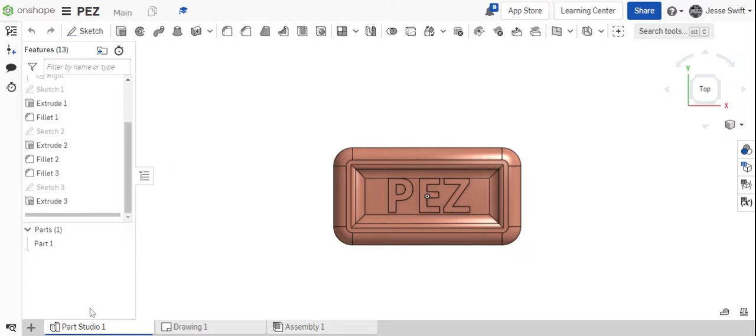All right, good morning. Today's goal is to have you draw a PEZ similar to this, and we're going to draw this to scale. So we're going to start with a new part studio, and you got to use your calipers and find the dimensions of your PEZ.

I did that earlier, and I found that my PEZ dimensions are 15 centimeters by 8 centimeters by 5 centimeters. So I'm going to start with a rectangle in the center, and then I'm going to dimension that.

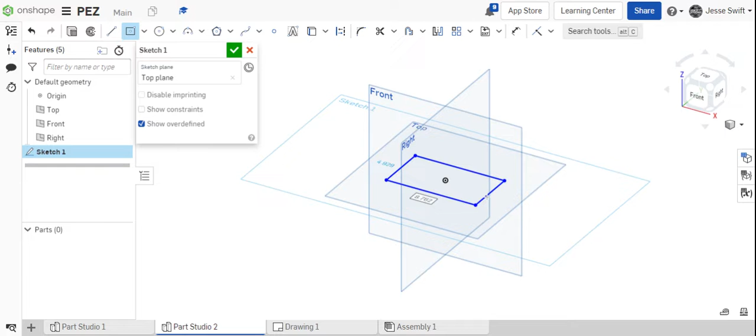That will be my 15 centimeters of length with a width of 8. And before I go any further, I'm going to use the fillet tool, and I'm going to fillet these corners and give them a nice curve.

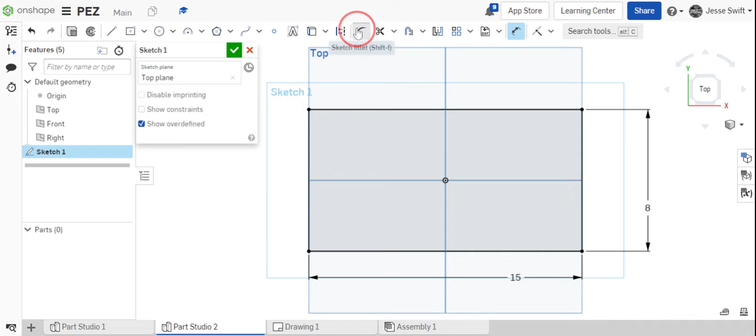And the fillet that we want to give is 1.5. That gives a nice rounded corner, and I'm going to select that to all of them.

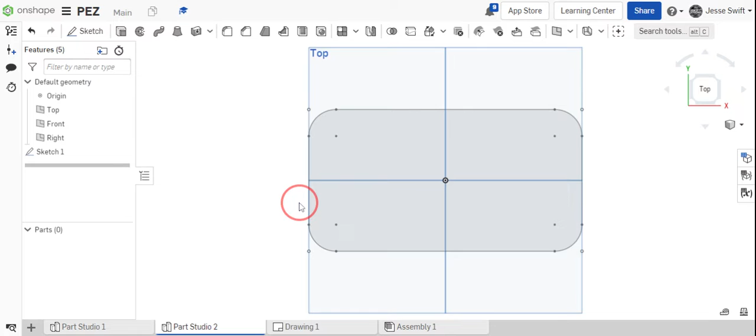So as I go around, I have my dimension in there. I can just click. All right, so that gives me the bottom shape. Now I can extrude that, and I'm going to extrude that the thickness of our PEZ, which is 5 centimeters.

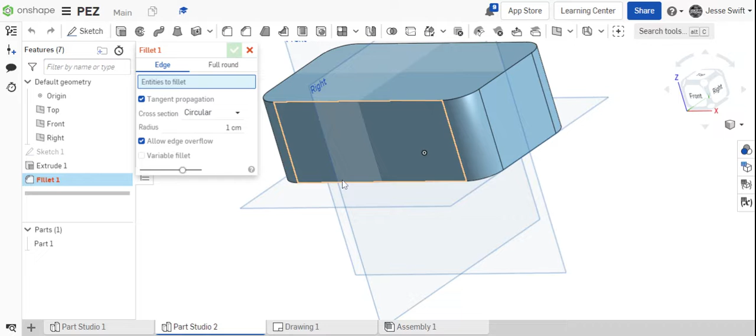All right, so after I've extruded it, now we want to put some more fillets on it. These fillets are going to be on all these edges. So I'm going to click my fillet tool, and this fillet is going to be 1 centimeter. I should be able to just click on the top and click on the bottom, and that gives it a fillet all the way around.

Now that I have that done, I'm going to turn off my planes. I don't like seeing those.

Now, the next thing I need to do is draw a rectangle. So I'm going to sketch here, and I'm going to press a rectangle here on the top. So again, I'm going to use my center point rectangle and find the center of my shape.

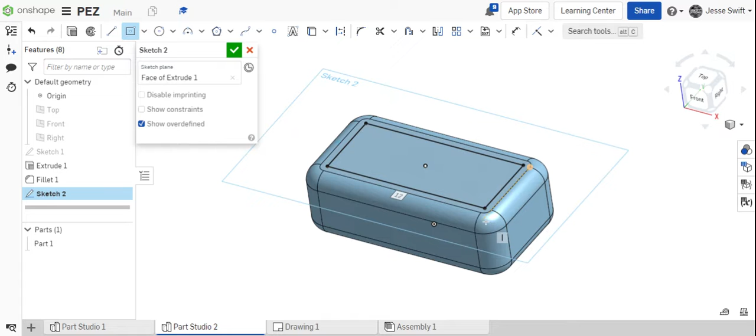And this one I'm not going to dimension. I'm just going to draw it out to the general dimension and size of the top of the PEZ. And now, after I've drawn that, I'm going to extrude that in, and I'm going to change the direction and extrude that in 0.5.

So it's just, oh, what happened here? Remove. There we go. So now I've got like a little depression in there.

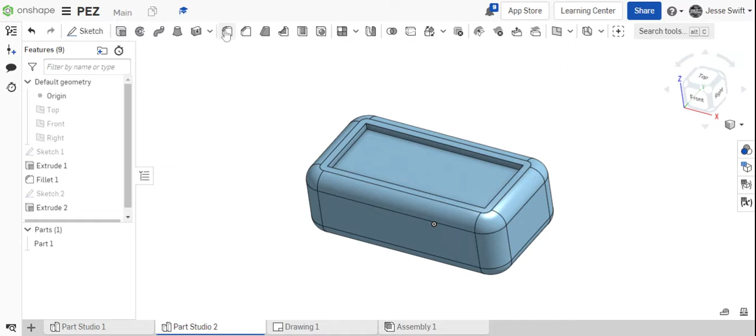Now that I've got that extruded, I'm going to use my fillet tool again, and I'm going to put some fillets around, but those are going to be, that's a pretty deep fillet, so I'm going to make that 0.5. So it's a small little fillet on all these corners.

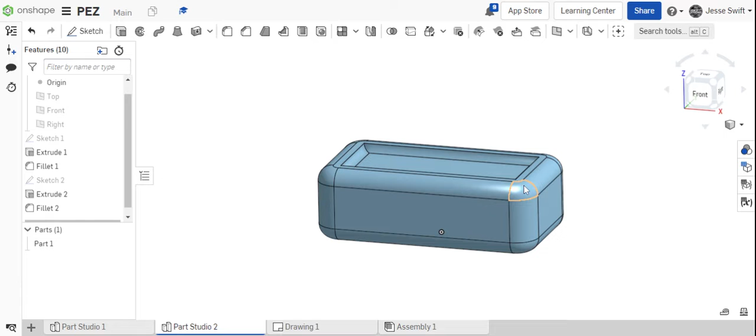All right, and then now I'm going to add one more fillet to the top corner here. So again, grab my fillet tool, and this again is a 0.5 fillet, and it's just giving it that nice rounded look here on the top. You could do this on the bottom too if you want, but I'm just more worried about the top look of my PEZ.

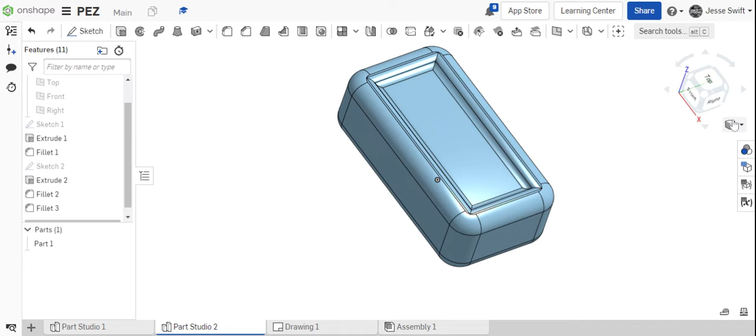Now I'm also going to change I'm going to do shaded without edges, and that kind of gives you that look of what a real PEZ might look like.

Now, I'm not quite done yet. I got one more step to do, and this is a tool that we haven't used in class, but we're going to sketch on this surface, and this time we're going to use this text tool here.

So I'm going to change my point of view, look at the top, grab my text tool, and I'm just going to draw the rectangle that I want to put the text into. Now I want to use a capital PEZ.

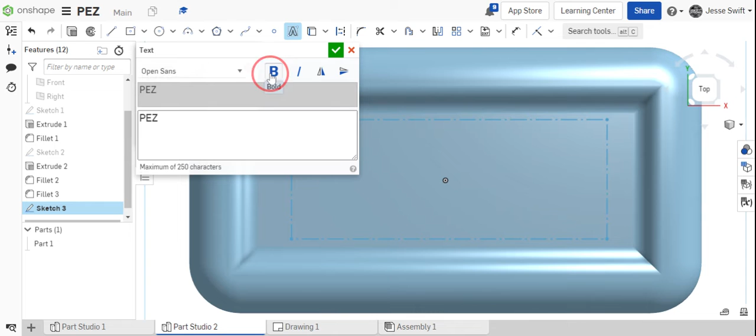I'm going to make it nice and bold. You can change the font if you want. I think Open Sans looks just fine. But now I click OK, and then it lays it down right in that space.

So I'm going to say OK with my sketch, and then my next step is to now extrude up that lettering. So you can see here as I click, that lettering comes all the way up.

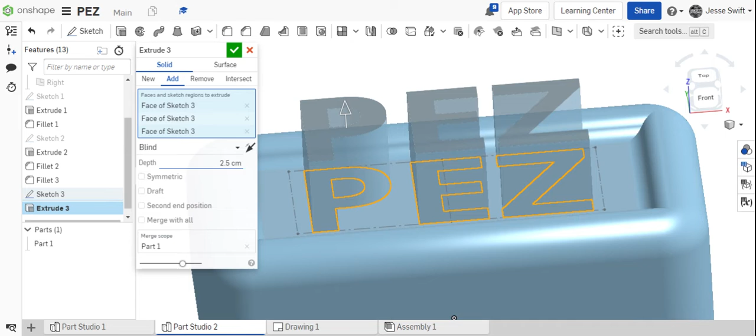That's a little too tall for me, so I'm going to change this down to 0.1. You could do anywhere from 0.1 to 0.2. It's up to you. But there we go. We've got our shaded PEZ.

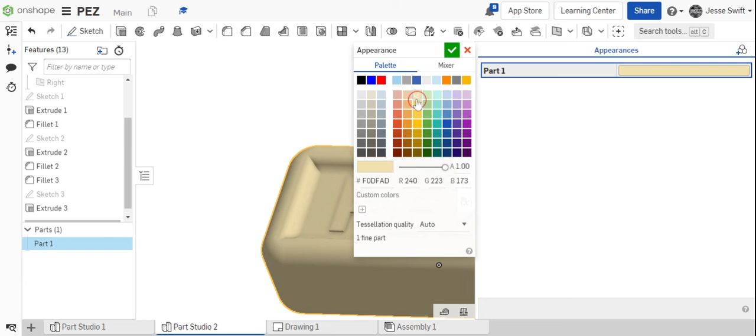Now the last thing I want you to do is change the appearance of it. Go to your appearance panel, edit your appearance, and decide what flavor PEZ are you going to do. You're going to do a lemon, something like this, and then go and close it.

Once you have that done, I want you to go through and make a technical drawing of your PEZ. And if we click here and look at the drawing of it, you should have your length, width and height of your PEZ.

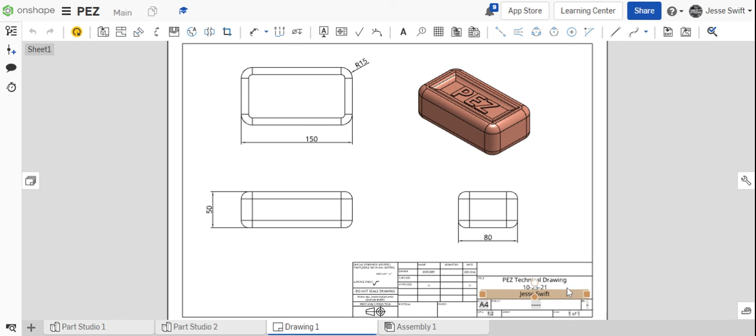You should have your radius of your fillets here. Have your isometric view that's shaded, and add a title block with what you've drawn, who drew it, and the date. So I hope that goes well for you.